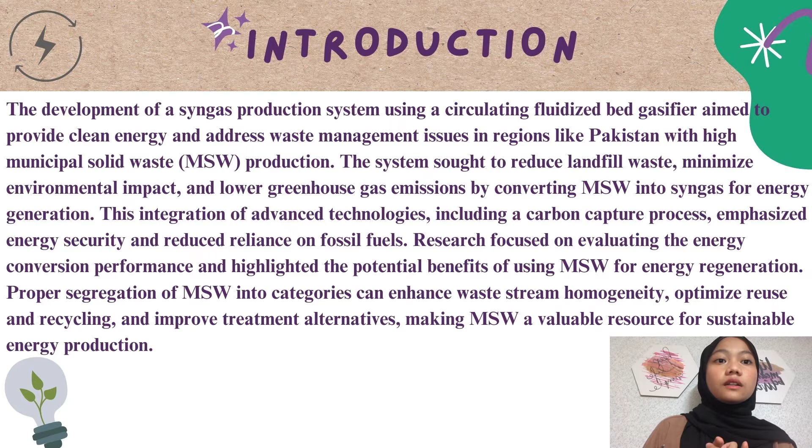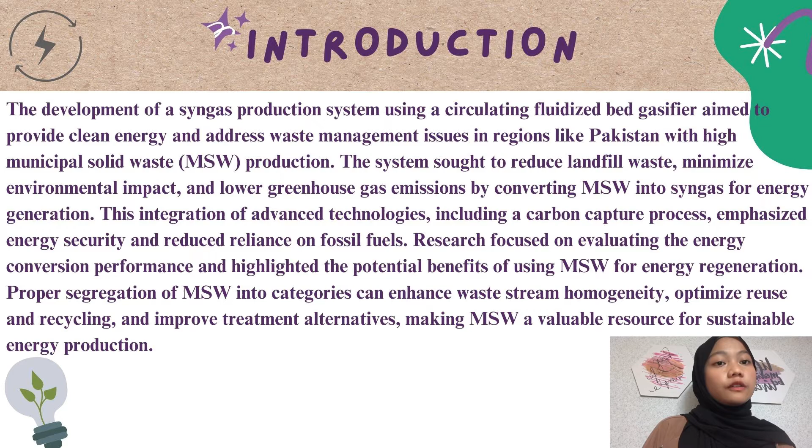Municipal solid waste is described as a heterogeneous resource containing various materials such as paper, food waste, wood, cotton, leather, and fabrics. Proper segregation of municipal solid waste into waste categories can enhance the homogeneity of waste streams, optimize waste reuse and recycling, and maximize the benefits of treatment alternatives for each category.

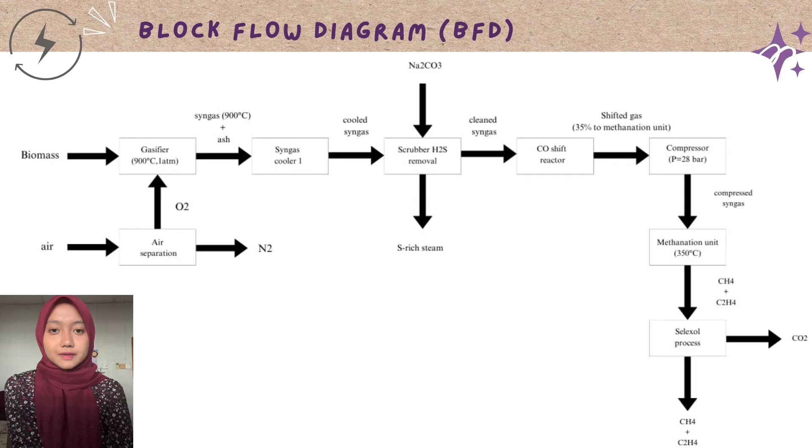So, we move to the next part, which is the block flow diagram. I will explain to you all about the block flow diagram that we created. We use municipal solid waste as a feedstock. Municipal solid waste consisting of everyday household and commercial waste is the primary feedstock for the gasification process. This waste undergoes a conversion process to produce a synthesis gas, a valuable intermediate for producing various chemicals and fuels.

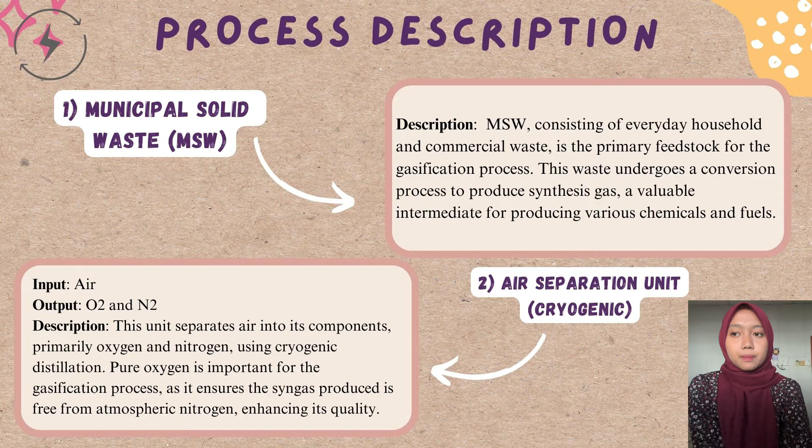Next, we move to the air separation unit, which is cryogenic. Input is air and output is oxygen and nitrogen. This unit separates air into its components, primarily oxygen and nitrogen, using cryogenic distillation. Pure oxygen is crucial for the gasification process as it ensures the syngas produced is free from atmospheric nitrogen, enhancing its quality.

Next is the gasifier. Input is municipal solid waste and oxygen. The output is syngas, which is at 900 degrees Celsius, and ash. In the gasifier, municipal solid waste is converted into the synthesis gas at high temperature, which is 900 degrees Celsius, and atmospheric pressure. Oxygen from the air separation unit is used to facilitate this conversion, resulting in a mixture of carbon monoxide, hydrogen, and other gases, while ash is left as a byproduct.

The next part is syngas cooler 1. Input is syngas, which is at 900 degrees Celsius, and the output is cooled syngas. This cooler reduces the temperature of the synthesis gas from 900 degrees Celsius, making it suitable for further processing. Cooling the syngas is essential for the subsequent impurity removal and reaction optimization.

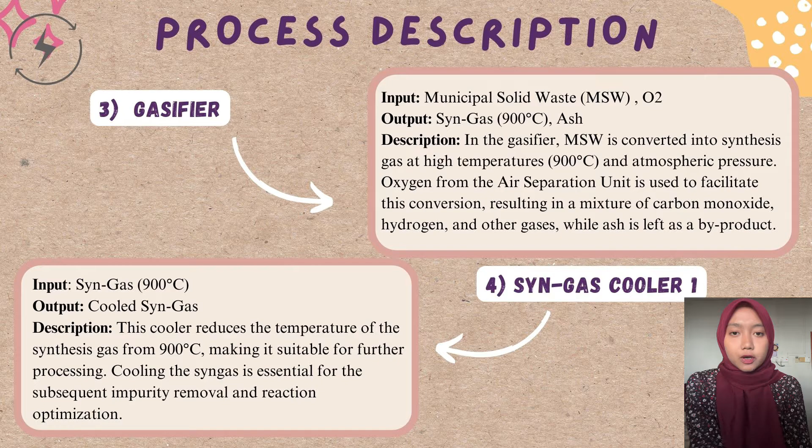Next, we move to the scrubber, which is H2S removal. The input is cooled syngas and sodium carbonate. The output is clean syngas and S-rich steam. The scrubber removes hydrogen sulfide and other impurities from the synthesis gas using sodium carbonate. This purification step ensures the syngas is clean, preventing sulfur-related issues in downstream processes.

Next, after the purification process is done inside the scrubber, the syngas is finally free from hydrogen sulfide and it produces a clean syngas, right? Okay, so this clean syngas will go to the next process, which is the methanation process.

But before that, it will be divided into two parts, where the first part, 35% of the clean syngas, will go directly to a compressor, whereas the balance, which is 65% of clean syngas, will have to go through a carbon monoxide shift reactor first, and only then can go to the compressor.

So what does this carbon monoxide shift reactor do? Inside the reactor, there will be a reaction called the water gas shift reaction. That is a reaction with the presence of steam. In this reaction, steam reacts with the carbon monoxide contained in syngas, producing carbon dioxide and hydrogen.

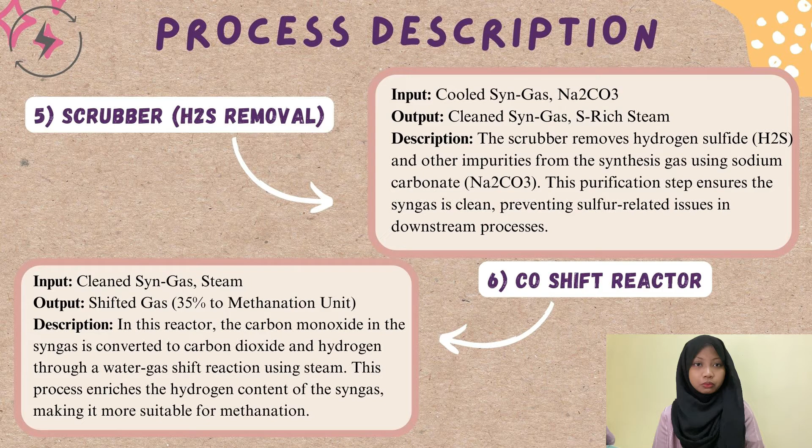The purpose of this reaction is to enrich the hydrogen content in the clean syngas to make it more suitable for further processing, which is the methanation process. Okay. And then we move to the next unit, which is the compressor.

So the clean syngas that is directly from the scrubber, the 35%, and the 65% clean syngas that has been enriched in hydrogen content will then go to a compressor, and inside this compressor the clean syngas will be highly pressurized to 28 bar. 28 bar is standard for biomass; the range is between 20 to 30 bar. In this case, we use 28 bar because it uses biomass.

This high pressure is necessary for the methanation process because it facilitates the conversion of hydrogen and carbon monoxide to methane. After that, the output is the compressed syngas, right? Okay, then this compressed syngas is moved to the methanation unit.

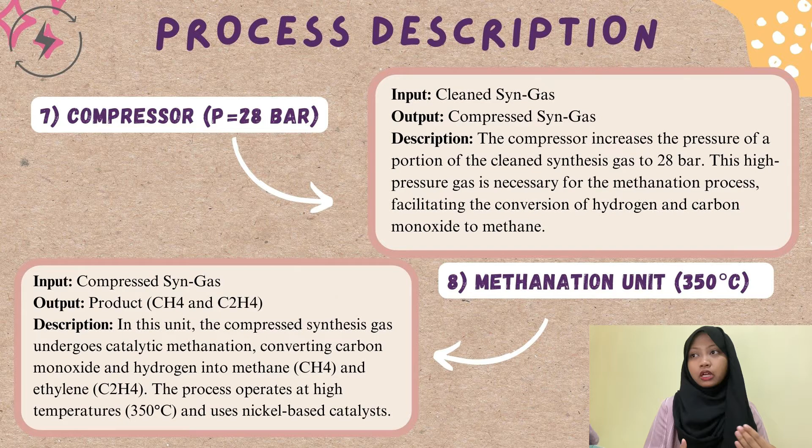In this methanation unit, we convert the compressed syngas into methane and ethylene. The compressed synthesis gas will undergo catalytic methanation, converting carbon monoxide and hydrogen into methane and ethylene. This process operates at high temperature, 350 degrees Celsius, and uses a nickel-based catalyst.

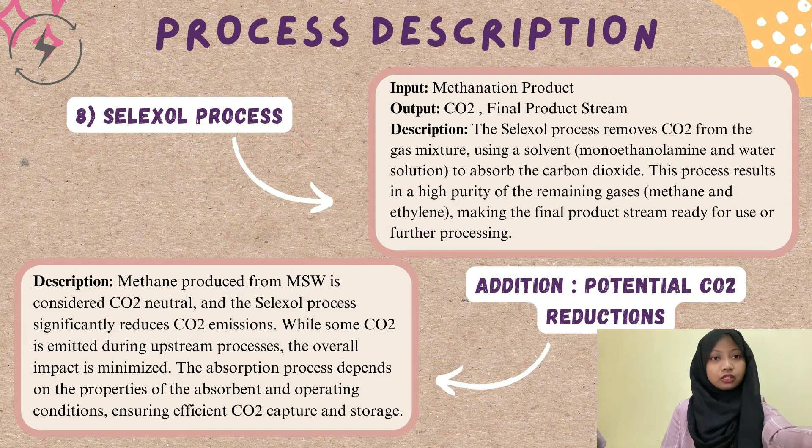Okay, so the process results in a high purity of the remaining gases, which are methane and ethylene, making the final product stream ready for use and further processing. So the main purpose of this Selexol process is to remove carbon dioxide from the methane and ethylene by absorbing it. Then the next process will be explained by Hanisa.

We add some additional information about our block flow diagram. First of all, why is sodium carbonate present in the input of the scrubber? Sodium carbonate is used in the scrubber for the removal of acidic gases, particularly hydrogen sulfide, from the syngas. Sodium carbonate reacts with hydrogen sulfide to form sodium hydrogen sulfide and sodium bicarbonate.

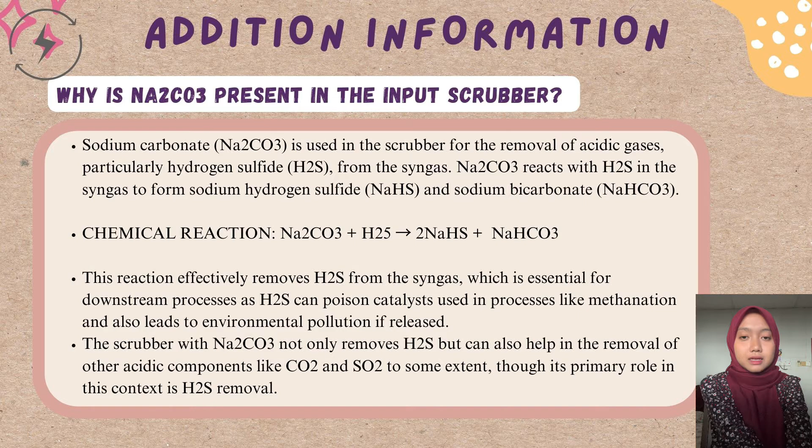The scrubber with sodium carbonate not only removes hydrogen sulfide but can also help in the removal of other acidic components like carbon dioxide and sulfur dioxide to some extent. But its primary role in this context is hydrogen sulfide removal.

The second one is why carbon dioxide is removed in the Selexol process. Carbon dioxide is removed from the syngas in the Selexol process to purify the final product gases, mainly methane and ethylene, and to meet quality requirements for their intended use. For methane and ethylene to be used as fuels and chemical feedstock, they need to be of high purity. Carbon dioxide is considered an impurity that can affect the quality and performance of these gases in their application.

In subsequent processes that use methane and ethylene, catalysts are often used, and the presence of carbon dioxide can negatively affect these catalysts, reducing their efficiency. Removing carbon dioxide from the product stream can help reduce greenhouse gas emissions if the carbon dioxide is captured and sequestered or utilized in other industrial processes rather than being released into the atmosphere.

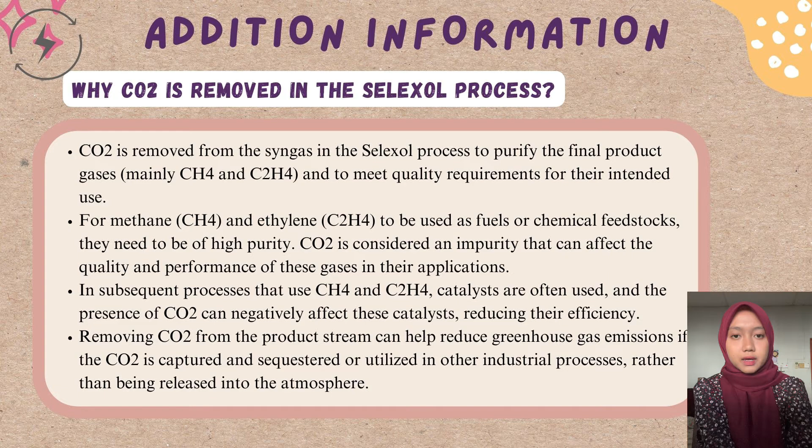The third part is why does the scrubber output have S-rich steam? The term S-rich steam refers to steam that has absorbed sulfur compounds, particularly hydrogen sulfide, during the scrubbing process. The cool syngas containing hydrogen sulfide and other impurities enters the scrubber. In the scrubber, the syngas is treated with a scrubbing agent, in this case sodium carbonate. The hydrogen sulfide reacts with sodium carbonate to form sodium hydrogen sulfide and carbon dioxide.

The chemical reaction is stated in the slide, as you can see, and steam is often injected into the scrubber to aid in the absorption of sulfur compounds. The steam helps maintain the required temperature and pressure for the reaction and enhances the mass transfer of hydrogen sulfide from the gas phase into the liquid phase, where the scrubbing reaction occurs.

As the scrubbing process proceeds, the steam absorbs sulfur compounds, primarily to form sodium hydrogen sulfide. This results in a steam that is rich in sulfur compounds, hence the term S-rich steam. So, that's all of my part.

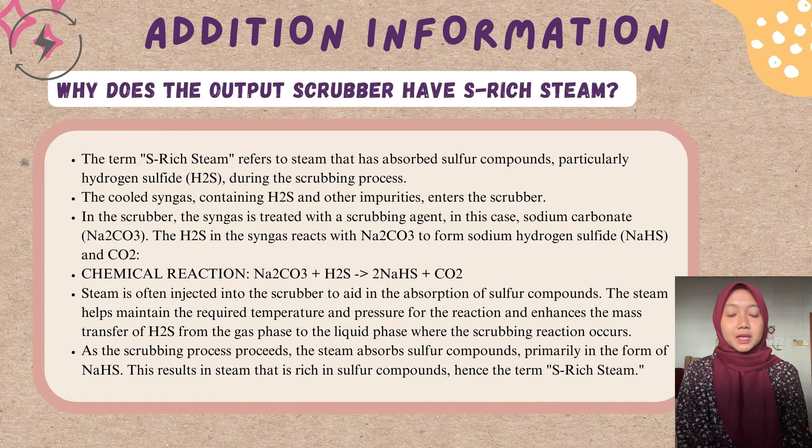We move to the process flow diagram, PFD. First is the air separation unit, cryogenic. 8.2464 kg per second of air enters the air separation unit, where it is cooled to cryogenic temperature to separate 6.3497 kg per second nitrogen and 1.8967 kg per second oxygen. It moves to the gasifier.

5.154 kg per second municipal solid waste and oxygen enter the gasifier, which operates at 900 degrees Celsius at 1 atm. The gasification process converts municipal solid waste into syngas with ash as a byproduct. Then it moves to syngas cooler 1. The hot syngas from the gasifier is cooled down in this unit.

Then it moves to the scrubber, which is H2S removal. The syngas enters the scrubber, where sodium carbonate is used to remove the hydrogen sulfide from the gas. The scrubber produces a sulfur-rich stream and clean syngas. Then it goes to the CO shift reactor.

The clean syngas undergoes the water-gas shift reaction in the CO shift reactor. This reactor increases the hydrogen content of the syngas. Steam is also added, and 65% of the clean syngas continues through the process. Then it moves to the compressor.

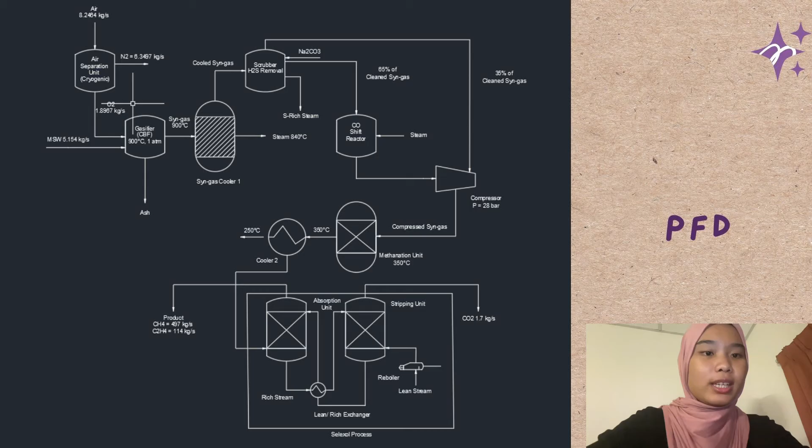So lastly, the conclusion that we got is that the production of syngas from municipal solid waste through gasification represents a promising approach to address both energy and waste management challenges, offering a sustainable and environmentally friendly solution for energy generation and resource recovery.

The gasification process for municipal solid waste has the potential to generate energy efficiently, with a significant total energy potential of 30 MW based on a reference plant capacity of 50 MW. Careful design and evaluation of material and energy balances for individual components of the gasification system are essential for optimizing energy production and system performance.

Municipal solid waste gasification not only contributes to energy production but also helps in solving the solid waste issue and reducing the reliance on landfills for waste disposal. Gasification of municipal solid waste into syngas provides a clean energy alternative, particularly in regions with high municipal solid waste production rates and limited resources like Pakistan.